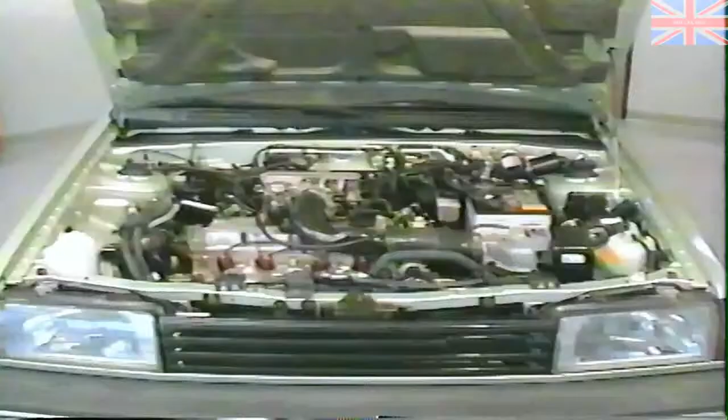Let's begin by reviewing the operation and function of the engine control system. Then we will look at the system's components and how they relate to each other and the engine control computer. The central or main controlling unit is the engine control computer. The computer takes input data from sensors that monitor various engine and environmental functions. The computer responds with signal outputs to various control devices.

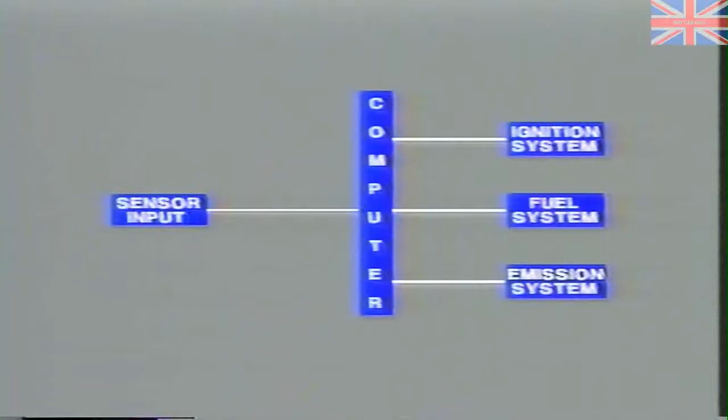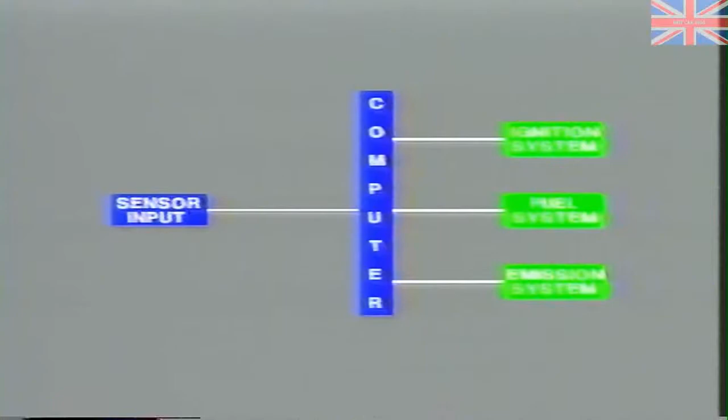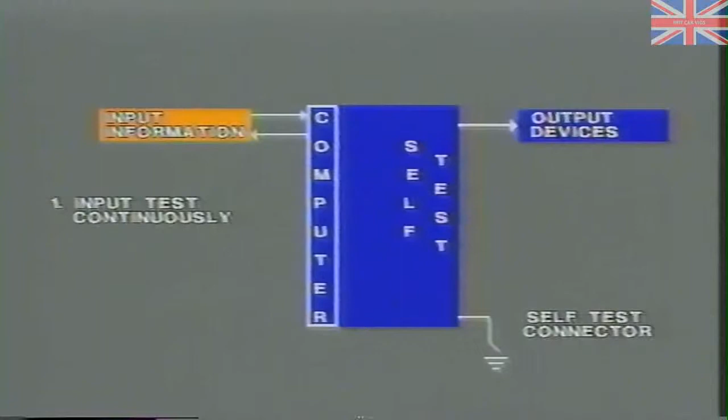The computer controls three primary areas: 1. The ignition system. 2. The fuel control system. And 3. The emission control system. The computer monitors the system input sensors and itself continuously as long as the vehicle is operating. But the computer only checks the output control devices once, during a 3-second period each time the ignition system is turned on and the self-test system is triggered.

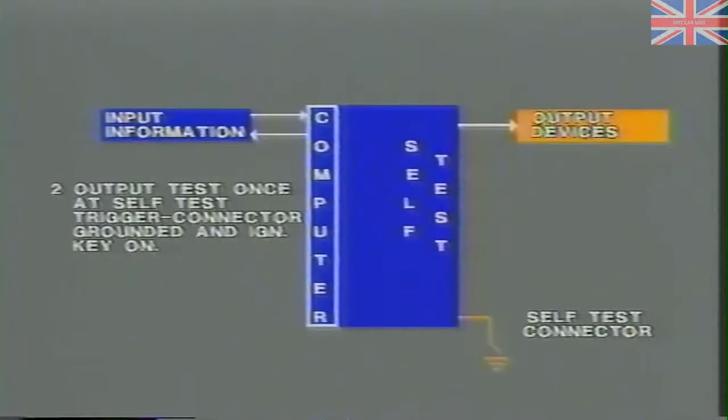This triggering is done by grounding the test connector in all vehicles. If a failure in an input sensor is detected during the self-test, the computer will substitute a pre-programmed value. Vehicle operation will automatically then be switched to a limp-in or fail-safe mode. Operations during the fail-safe mode or limp-in mode are limited in scope and drivability can be quite poor, but the vehicle will move. No substitution is performed by the computer for output devices.

The engine computer is located under the dashboard, on the transmission hump behind the console. The diagnostics display is the check engine light on 1988 and newer models. There is none on older vehicles. This light can be utilized on certain models along with the onboard diagnostic system in the central computer to display trouble codes. It can also be used to check certain switches like the clutch switch and the brake switch.

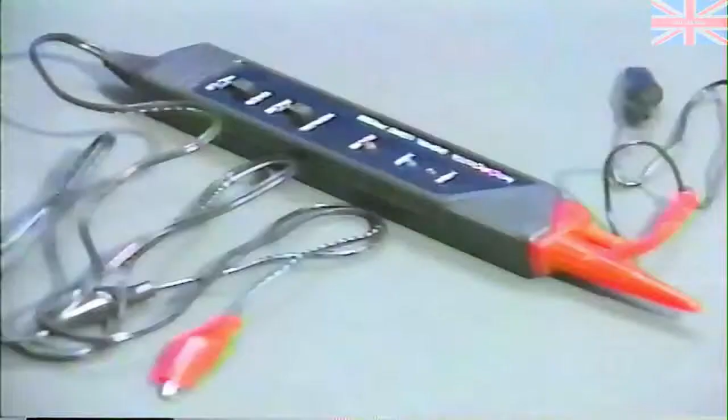In vehicles that do not use the check engine light, additional handheld test equipment like this simple logic probe must be utilized to access the codes. Logic probes can be purchased from consumer electronics stores like Radio Shack. Also, the OEM sells a test box. Let's take a closer look.

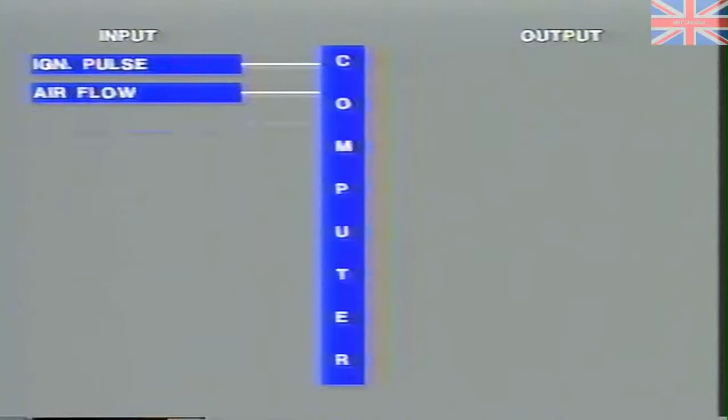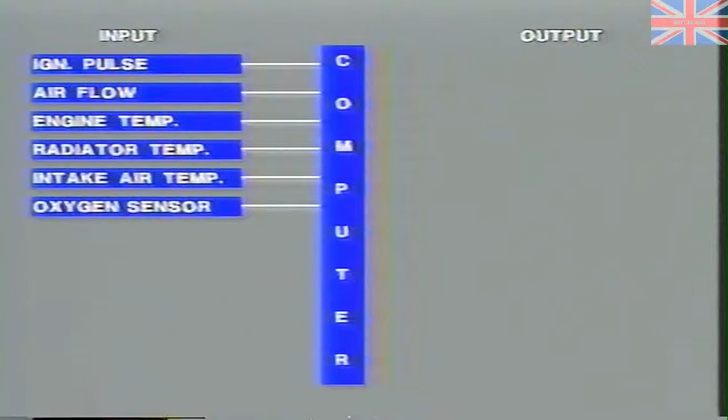The engine control computer receives sensor input readings from the ignition's distributor for RPM and crank angle, an airflow meter signal, water temperature sensor signals—one for engine temperature, one for radiator temperature—an air intake temperature sensor, the oxygen sensor, a barometric pressure sensor, throttle position sensor, a knock sensor on turbo applications, an idle position switch, an EGR position sensor, and a series of miscellaneous switches that can include air conditioning, automatic transmission, power steering, gear shift, etc.

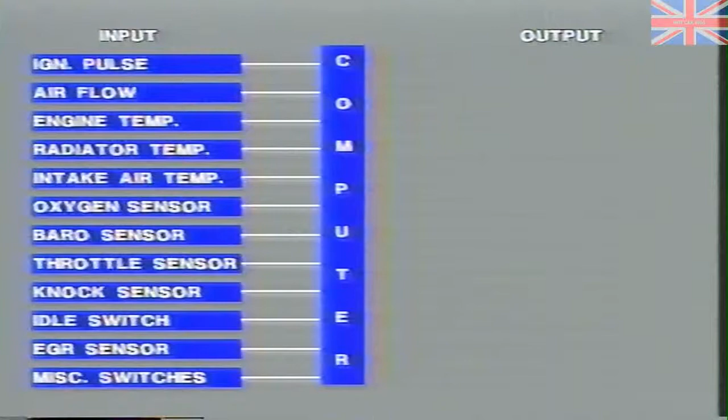The computer uses these input signals and processes them with pre-programmed information. It then responds with signal outputs to control the idle speed, control the electronic fuel injection system, exhaust gas recirculation, the evaporative emission control system, the shift indicator control system, fuel pressure control solenoid, the check engine light for self-diagnostics, and the ignition timing function.

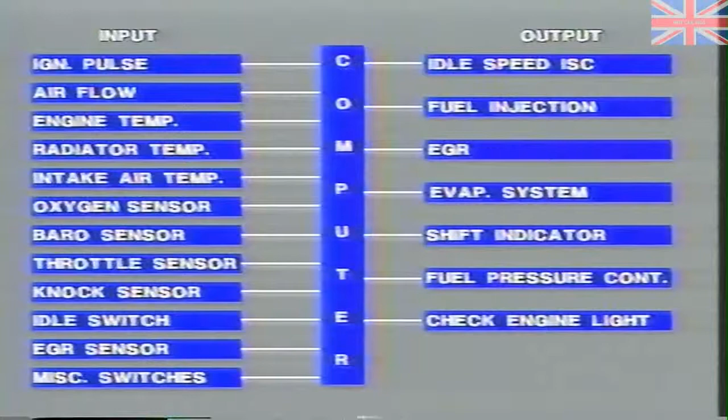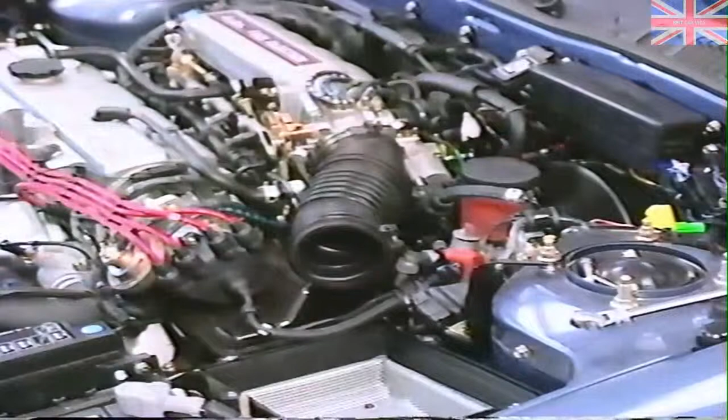A quick review of Mazda's electronic gas injection system, EGI, shows that it has an air filter assembly and ductwork, a Bosch-style vane airflow meter containing an inlet air temperature sensor, a throttle position switch mounted on the throttle body assembly, and air plenum.

The system has an electric fuel pump mounted inside the fuel tank. The pump contains a drain check valve and feeds fuel to an inline filter. The pump control switch is mounted inside the vane airflow assembly.

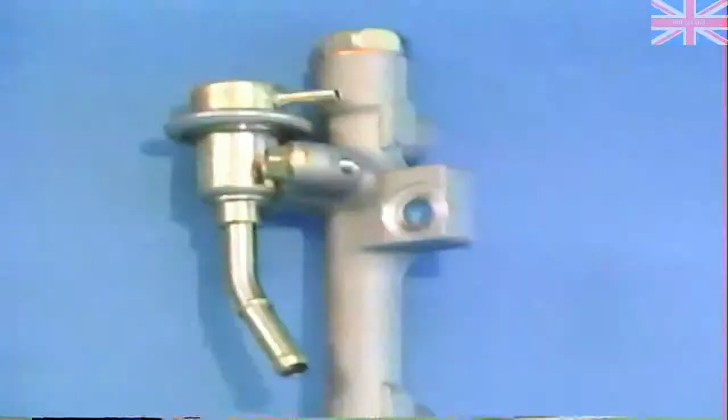Fuel flows from the filter into the fuel rail through a fuel pressure damper. Each individual injector is supplied fuel from the pressure rail. Pressure is maintained by the fuel pressure regulator mounted on the end of the fuel rail. The control pressure is a function of a spring and a vacuum signal. Excess fuel not used by the injectors flows back to the fuel tank.

Mazda does not use the cold start injector system on any of the cars with electric gas injection.

The computer's sensor inputs control the fuel injection system in two basic modes of operation. You should all be familiar with the words open loop and closed loop. In a Mazda, they don't work any differently than any other vehicle. The system operates in open loop below a certain temperature and under certain driving conditions. Closed loop operation is used to derive the most beneficial effect of the emission control system in all other modes of operation.

In open loop, the fuel injection pulse width is controlled by the computer and the computer program itself, without any input from the engine's oxygen sensor or a feedback information system.

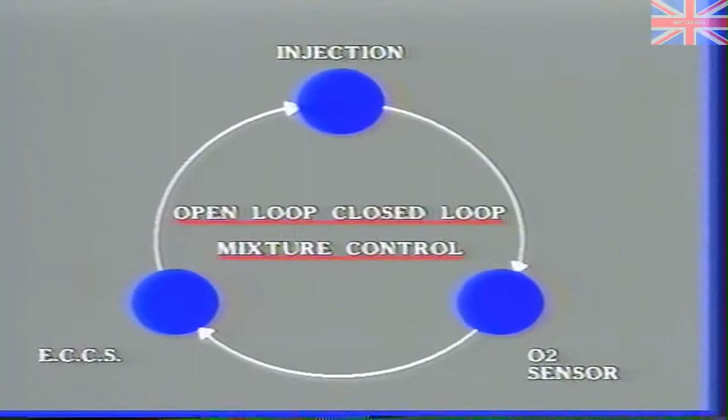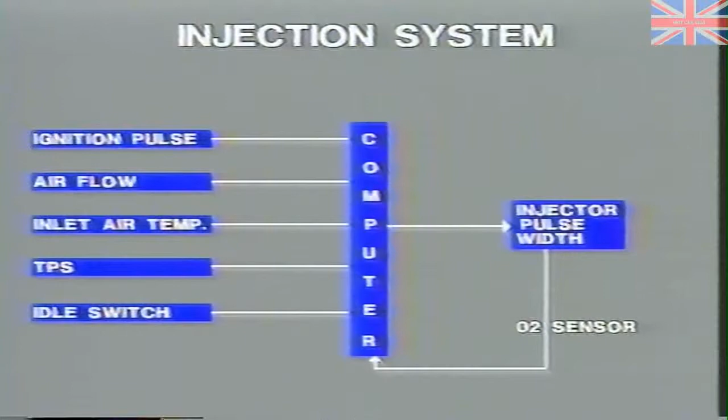In closed loop operation, the computer uses basic input signals from the engine's distributor, giving an RPM and/or cylinder position signal, the airflow meter and inlet air temperature sensor which together supply a signal on the mass of incoming air, the throttle position sensor and idle switch signaling demand on the engine, and the exhaust gas oxygen sensor signaling the outcome of the combustion process. These inputs operating together determine the fuel injector's pulse width to help minimize emission and increase drivability.

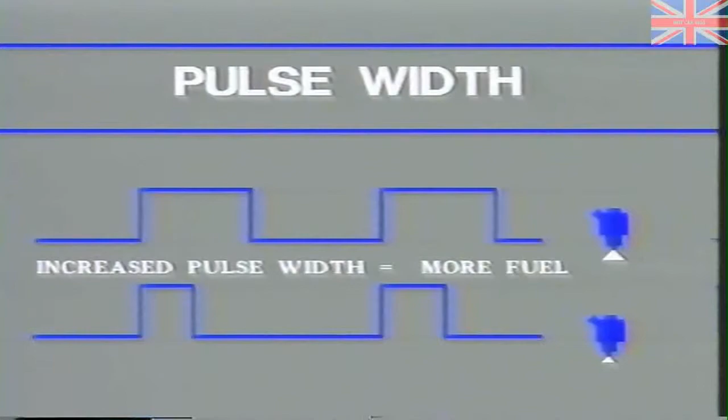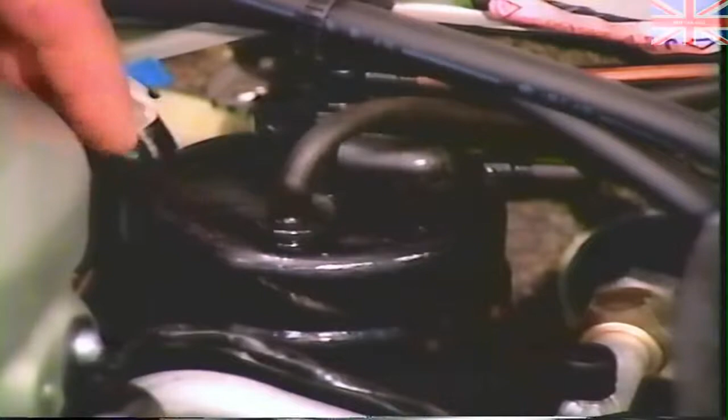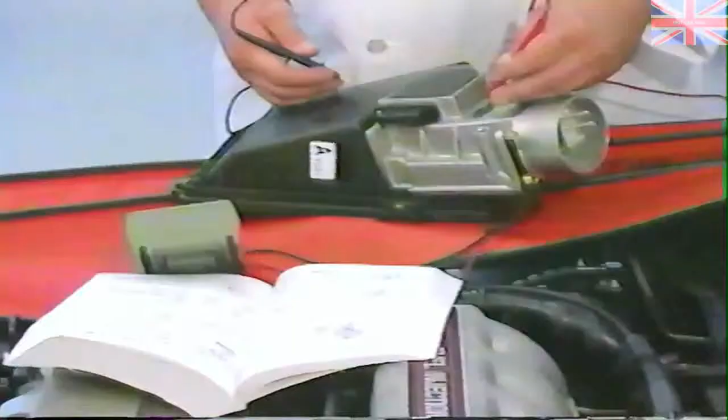The emission control system contains no surprises. A conventional evaporative system, EEC, is designed to trap fuel fumes in a charcoal canister. Two solenoid valves control canister purge, receiving their signals from the engine control computer, which uses input information from the airflow meter and water temperature sensors.

The EGR system is also fairly conventional in layout. In this MX6, or the Ford Probe, the EGR function is controlled by the computer, which uses primary input information from the throttle valve sensor, engine coolant temperature signal, radiator water temperature signal, an RPM signal from the distributor, and a transmission signal. The computer makes a decision and sends a signal to the EGR solenoid valve, which controls the vacuum available to the EGR modulator valve. The vacuum modulator assists in controlling vacuum to the EGR valve.

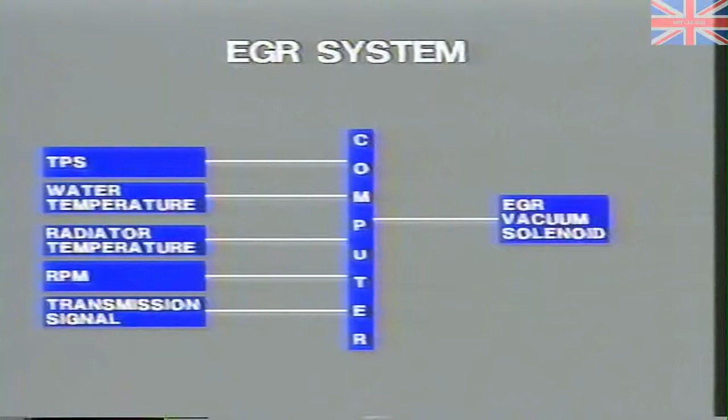Other components of the emission control system include a PCV valve system, a deceleration fuel control system, and a catalyst system. The third system, controlled by the engine computer, is the ignition system.

Depending on the engine style and the year, the timing function can be controlled either by centrifugal advance, vacuum advance, or an electronic spark advance, ESA.

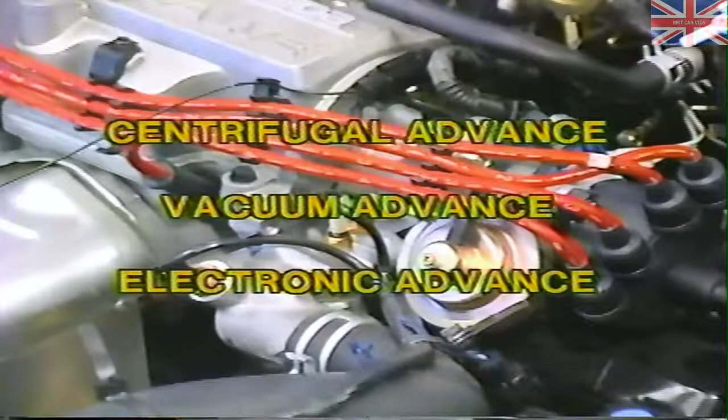Electronic spark advance is found on the 2.2-liter turbocharged engine on the MX6 and Ford Probe, also in turbo engines used on the 323. All turbo applications use a knock sensor to retard timing.

The computer controls timing by processing signals from the airflow meter, the idle switch, the clutch or neutral switch, the EGR position sensor, a knock sensor, throttle sensor, water temperature sensor and water thermo switch, an inhibitor switch, and the electronic control automatic transmission control unit.

The computer controlling signal is used by the ignition igniter assembly. The igniter assembly, or ignition module, controls the primary current flow through the ignition coil. This control of the coil's primary current flow controls the ignition spark advance.

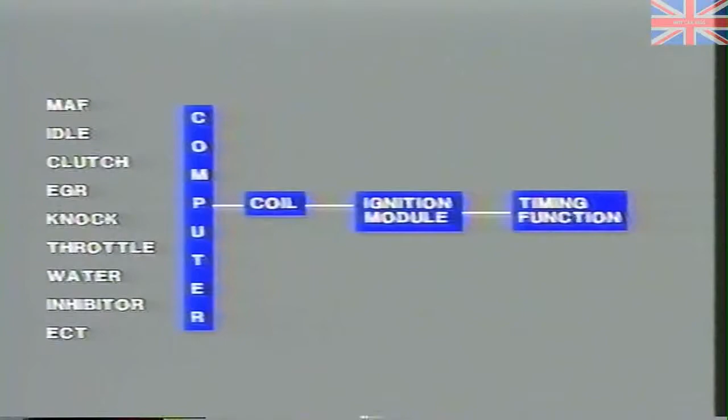Mazda also utilizes the concept of HEI, high energy ignition, on many of their ignitions. As you know, this is merely a function of the output voltage available from the ignition coil.

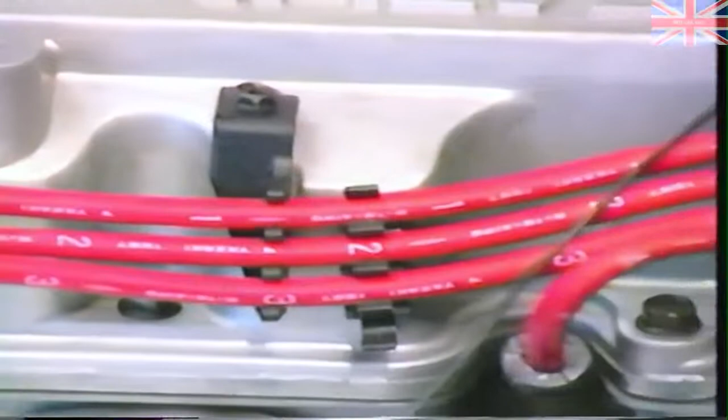A very conventional appearing secondary system is utilized for wires, cap, and rotor.

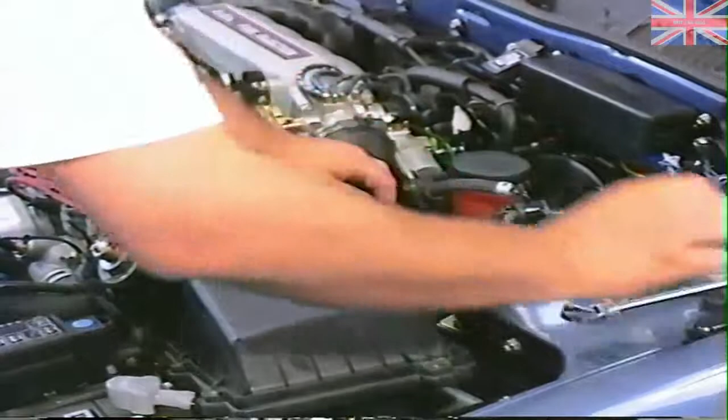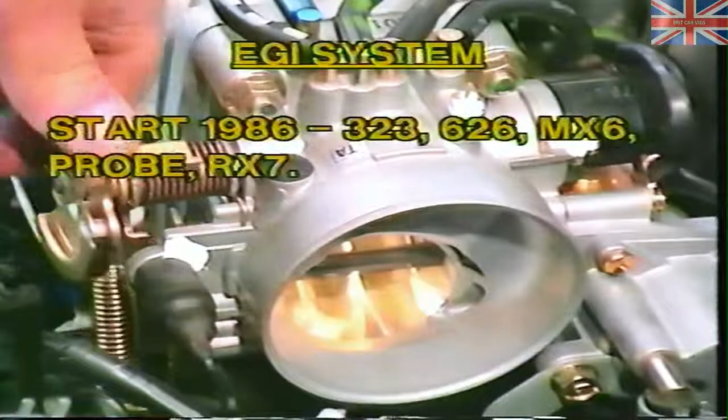The individual components utilized by Mazda throughout their electronic engine control and fuel injection system should be familiar, as they are not any different than any other brands. The electronic engine control and electronic gas injection, EGI, system has been used by Mazda since 1986 on the 323 and 626 models.

Many of the sensors utilized in the 323, MX6, 626, and Ford Probe are also utilized for the RX-7. In fact, the engine control system is similar.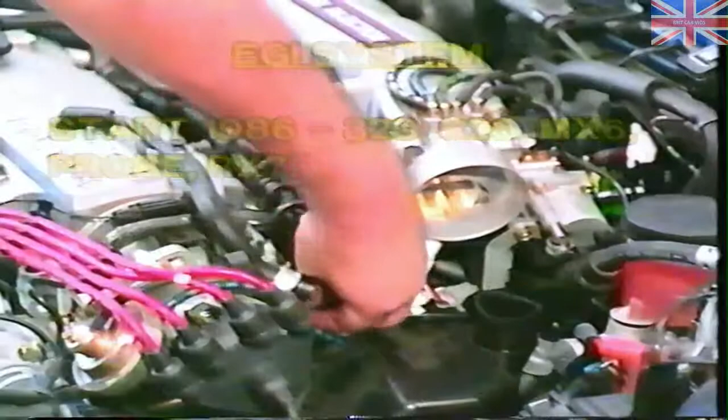We will not make any attempt to perform diagnostics or repair functions on an RX-7 during this program.

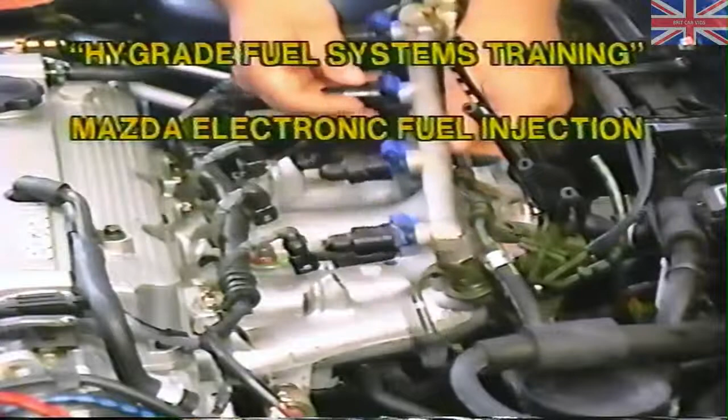Additional information on the electronic engine control system as it relates to the fuel injection system can be found by viewing the Hygrade Fuel Systems Training videotape entitled Mazda Electronic Fuel Injection.

That's it. We have covered the basic components and functions of Mazda electronic engine control systems. Now, to repair some common problems.

Hands-on experience may be the best teacher, but through the use of video, we can simulate everything except your hands actually touching the components. Ready to begin?

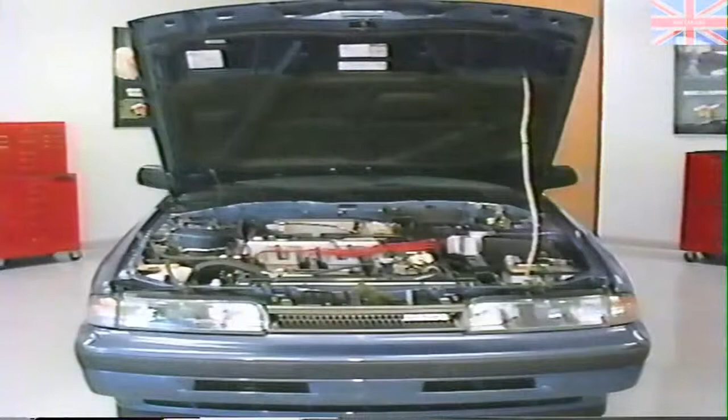This Mazda is similar to all 323 and 626 electronic engine control systems since 1986. The owner of this MX-6 has called and requested you pick up the vehicle with a wrecker.

The complaint is a no-start condition. Upon questioning the customer, you find that over the past few weeks the vehicle has been repeatedly difficult to start, but on previous occasions, after repeated attempts, the vehicle would run.

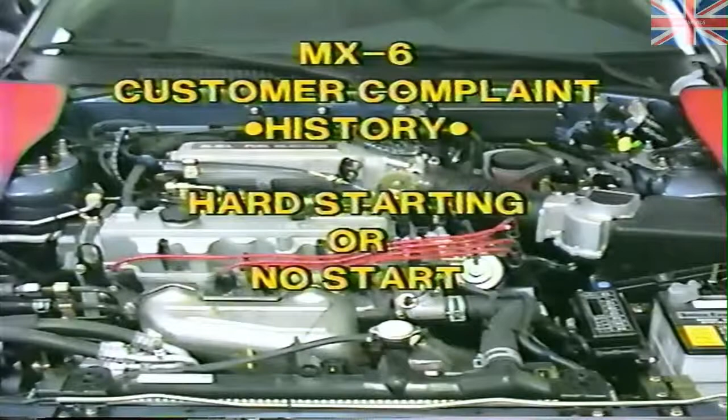With the car in the shop, what is the first step? What do we look for?

Even though you don't work on Mazdas very often, and in fact you much prefer working on domestic cars, you are willing to give it a try.

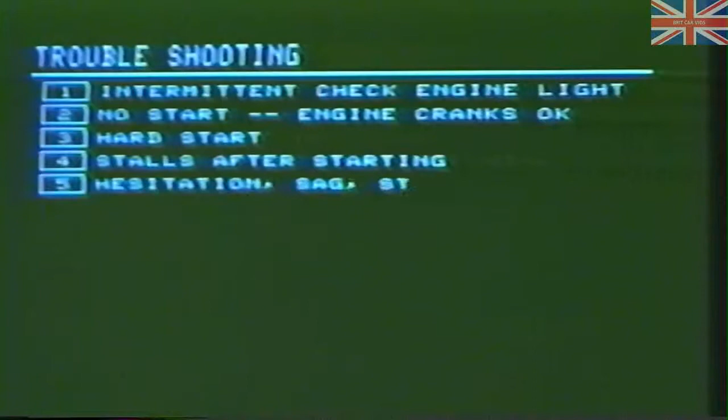As you follow along with this program, you will see that it is not any harder to repair this Mazda than a domestic car. The first thing we need to do is follow a logical approach to troubleshooting.

Ask the customer for some general information, especially about the exact year and model of the vehicle. The engine style is very important.

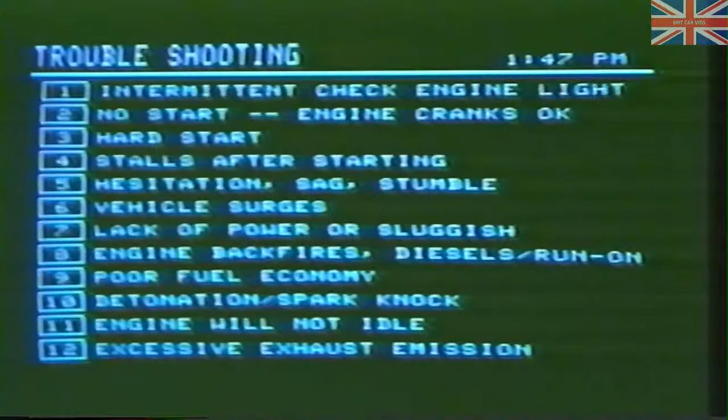Then ask the customer the questions necessary to determine exactly what the complaints are and the history on the vehicle. Remember, you cannot diagnose a problem that does not exist.

Keep in mind that the self-diagnostic system in this vehicle cannot troubleshoot everything. There are certain things that should be checked visually or with some simple test equipment, like a volt-ohm meter or a logic probe, before beginning to work on the computer itself.

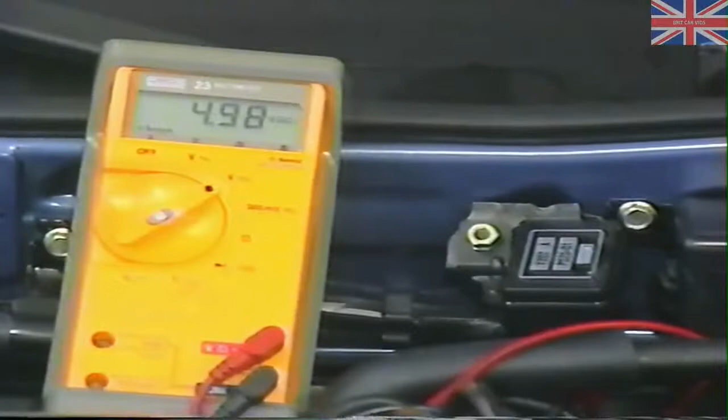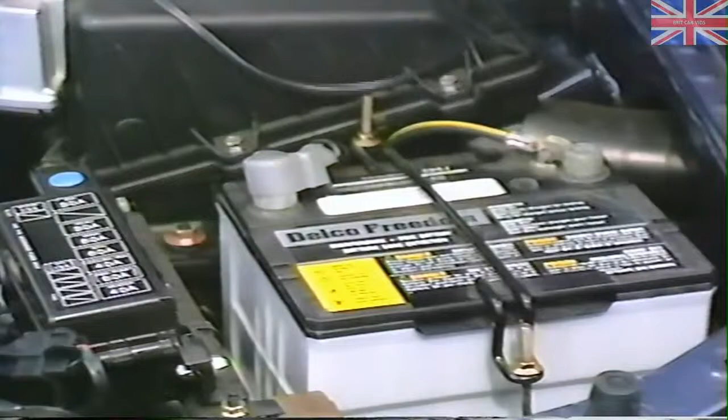Considering a no-start situation, or at least an intermittent one, we should first check the ability of the starting system to turn the engine over. Check the battery leads, the cranking system. Remember to always check the obvious.

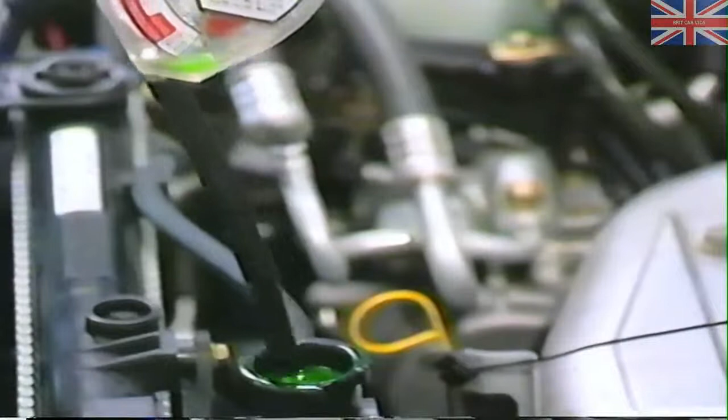Check the primary and secondary ignition systems in the normal manner. Always check the antifreeze and coolant level. Remember, the computer must have an accurate temperature sensor reading to compute the proper air-fuel mixture to run the engine.

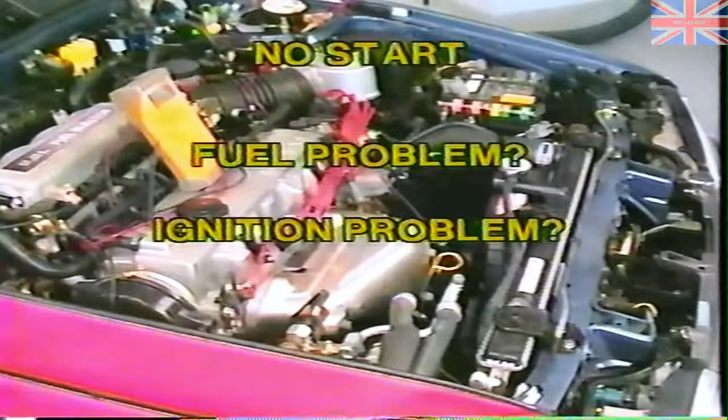A no-start situation could be fuel, and it could be ignition. Since it is obvious by turning the key that the engine turns over, the first step would be to determine whether a fuel problem exists or an ignition problem exists.

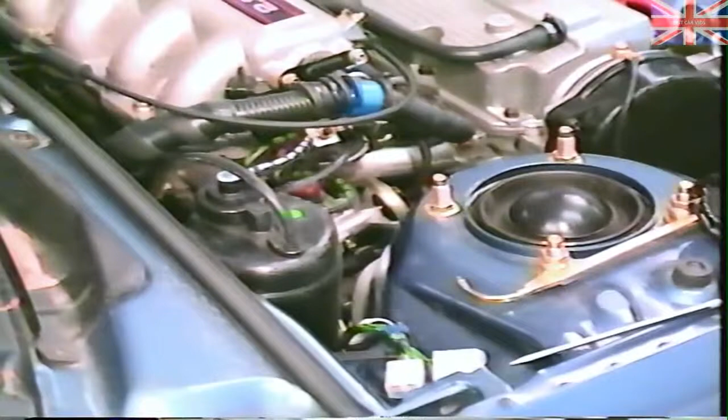Since this program is designed to deal primarily with the engine control system as it relates to ignition and emission control, we will follow the electrical-related branch of a trouble tree. Any problems related to a fuel system will not be covered here.

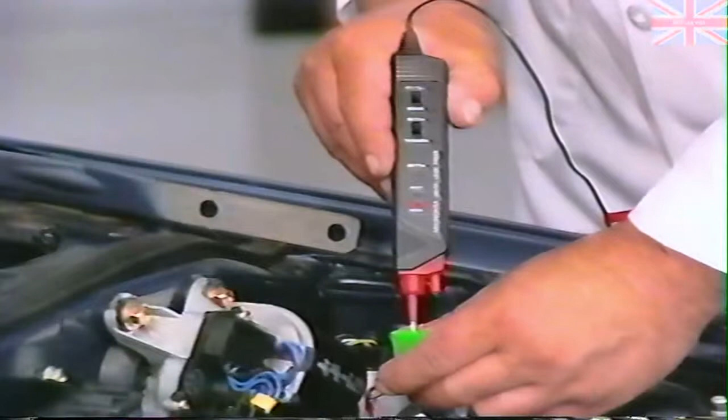The easiest method to troubleshoot this vehicle is to utilize the onboard diagnostic system first and eliminate those problems with trouble code readouts. Even though Mazda says that you should purchase or utilize their proprietary diagnostic equipment, it is a simple matter to derive trouble codes utilizing a logic probe on all models since 1986.

On 1988 and newer vehicles, it is possible to utilize the check engine light on the dashboard.

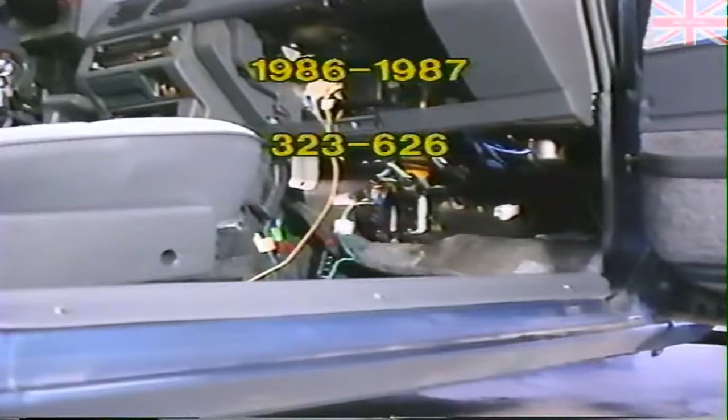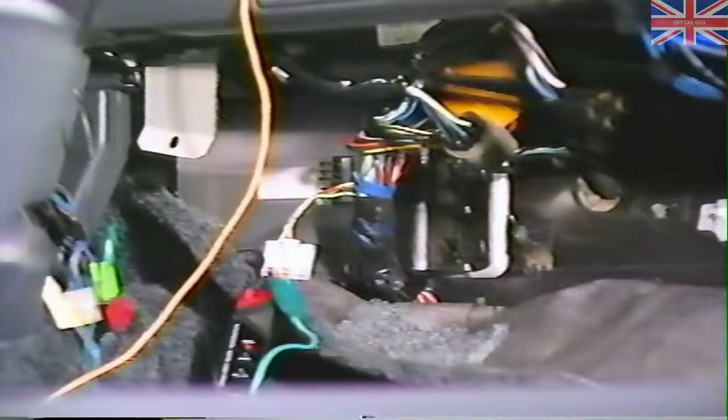On 1986 and '87 323 and 626 models, the self-test connector is found adjacent to the engine control computer on the transmission hump. After moving the carpeting out of the way, or moving the computer itself, follow the wiring harness from the computer towards the engine compartment.

Locate the 6-pin connector and the single green connector. Pull them free of the harness wires to gain access to the plugs.

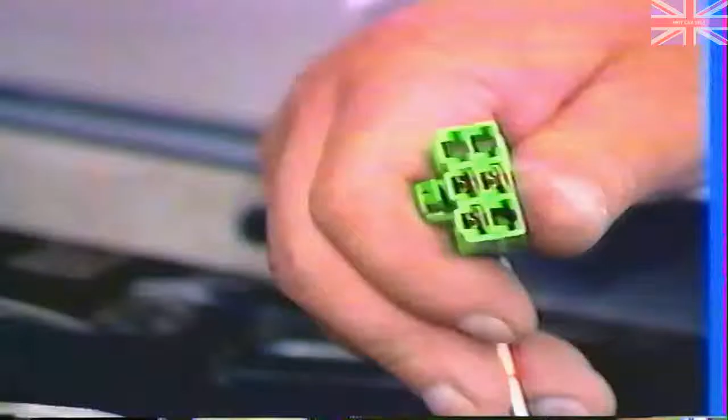If you are utilizing Mazda test equipment, simply plug the 6-pin connector into the self-diagnostics checker on the 323 and turn on the ignition switch.

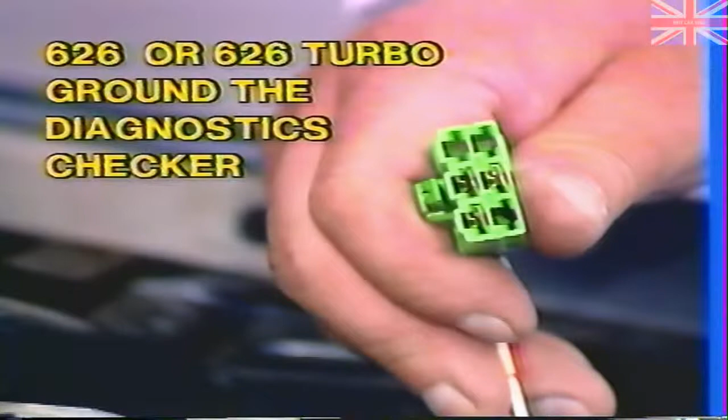If you are testing a 626 or a 626 turbo, you must also ground the Mazda diagnostics checker. Remember, the Mazda computer system only checks the output devices when the system test connector is grounded and the ignition switch is turned on. If you did not ground the test connector, only input devices will read trouble codes.

If you are working on a 1988 or newer 323, Mercury Tracer, Ford Probe, 626, or MX6, the 6-pin green plug will be found in the engine compartment near the master cylinder.

Besides the Mazda tester, you may also utilize a simple logic probe to test for codes. A logic probe is a solid-state electronics test device that will read the trouble code computer information string and also give an audio buzzer signal of the trouble code string triggered by the computer's diagnostic circuit.

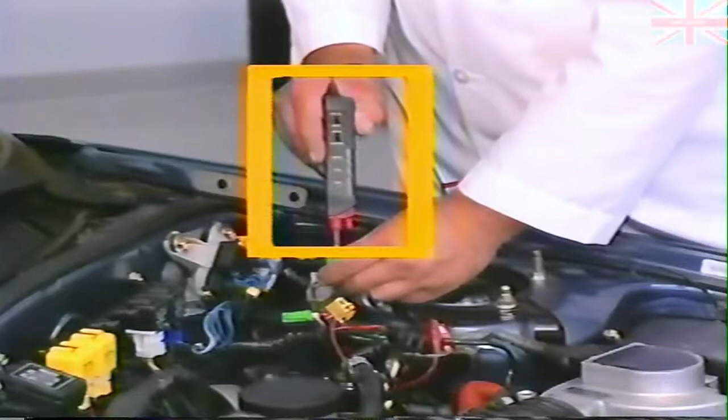First step in hooking up the probe is to connect the black and red leads of the logic probe to a power source. Next, insert the needle probe of the logic tester into the appropriate pin on the 6-pin connector. Turn on the ignition switch and read trouble codes. If you want to check output devices, ground the single lead from the harness assembly.

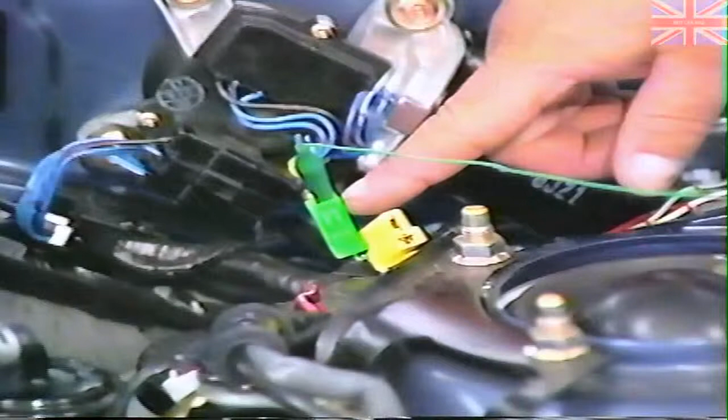If you have a 1988 or newer vehicle and will be using the dash check engine indicator, simply turn on the ignition switch and ground the single lead connector. This will trigger self-diagnostics utilizing the dashboard light. Since we are working on a 1988 MX6, which is also identical to the Ford Probe, we could utilize the dashboard indicator light, but we will also hook up the logic probe to illustrate the connection.

With the equipment hooked up and the logic probe powered, turn on the ignition switch. Note any codes for future reference. Remember, codes vary by year and model of the car. On, off, on, off. A 01. This indicates a problem with the ignition pulse or no ignition signal. That makes sense, since the vehicle will not start.

First, check the ignition coil, both primary and secondary. Specifications for the primary coil winding for a non-turbo are 1.04 to 1.27 ohms. Now, check the secondary. This looks like a simple epoxy coil, like the E-coil found on GM vehicles. On a non-turbo vehicle, we are looking for between 7,000 and 10,000 ohms.

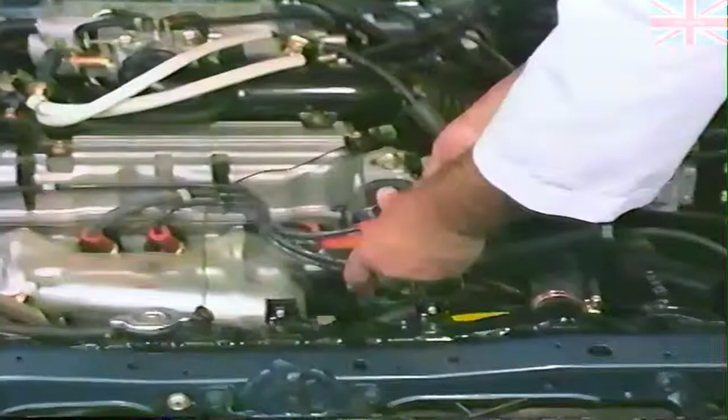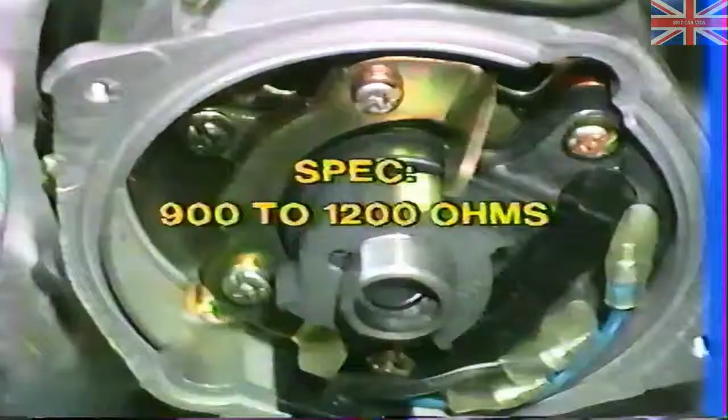Check the high tension lead for continuity. Remove the distributor cap and check the rotor and cap for carbon tracking. With these tests completed and the problem still not located, proceed with the next step. Do a resistance check on the igniter pickup coil. It should read between 900 and 1200 ohms. This is also within specification.

Next, consulting a schematic illustrates that the power feed to the ignition coil from the battery travels through the engine main relay. The relay supplies power to both the ignition coil and the injectors. The schematic illustrates that the engine control computer switches the ground side of the ignition coil to complete the primary winding's current flow in order to fire the coil. Obviously, the trigger is the igniter module input from the magnetic pickup. That has already checked OK.

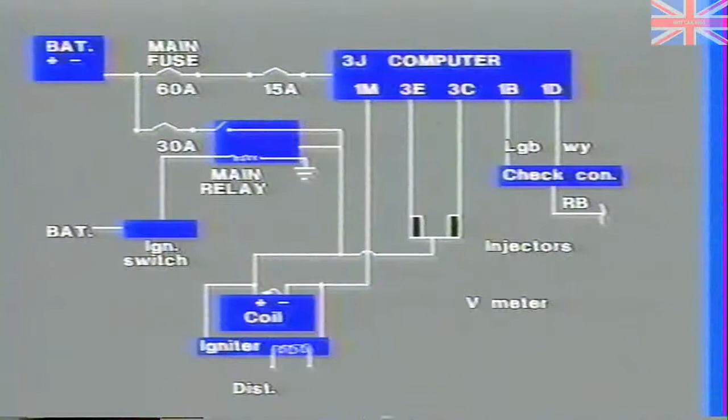Do a power check with a high-impedance digital volt-ohm meter at the negative terminal of the ignition coil. With the key on, there should be battery voltage in both crank and run position. If no power is present, check the engine main relay. Since we have power present, the next test point is at the computer itself.

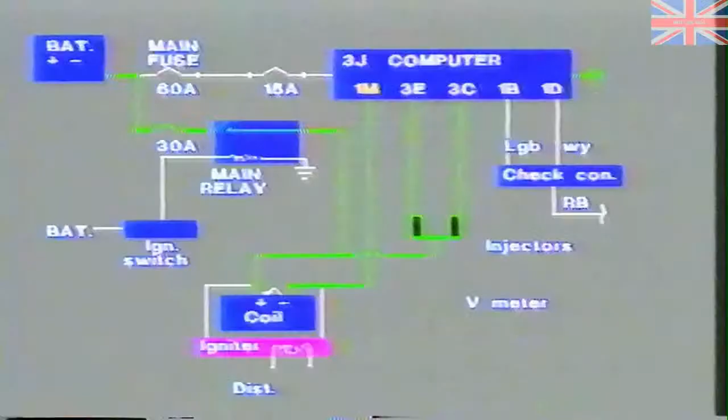Mazda does manufacture a proprietary test box not unlike a Ford breakout box, which connects between the engine computer and the harness. This breakout box will supply both current and voltage readings on each pin position. But utilizing a high-impedance digital volt-ohm meter or a logic probe, it is possible and permissible to determine if battery voltage is available on pin 1M of the engine computer.

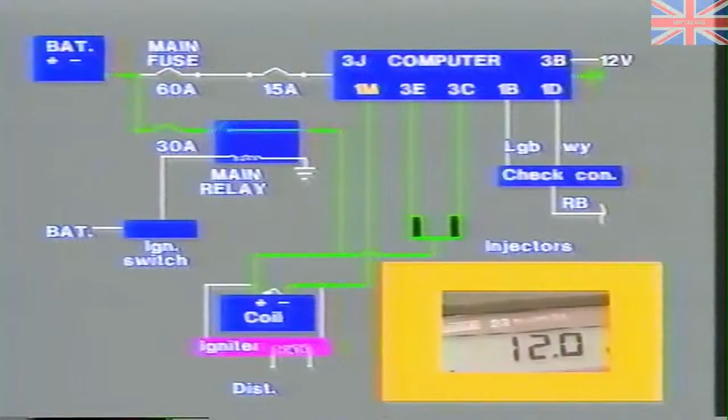With the ignition key on, battery voltage should be present on 1M. Crank the engine. It should still have battery voltage available. Since we have 12 volts at pin 1M, we are close to the problem. Check the power to the computer from the ignition switch, terminal 3B of the computer. 12 volts is available with the key on and in the start position. Based on these findings, it will be necessary to replace the engine control computer.

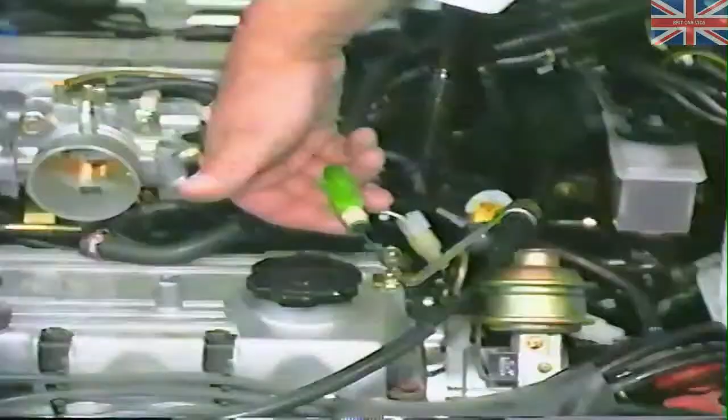With the computer replaced, start the engine and allow it to come to operating temperature. Next, make sure all the electrical loads are off, including the air conditioner. Connect the timing light and verify initial timing. Connect a jumper wire between this green test connector and ground located adjacent to the distributor. Now, recheck the idle speed. It should be approximately 750 RPM.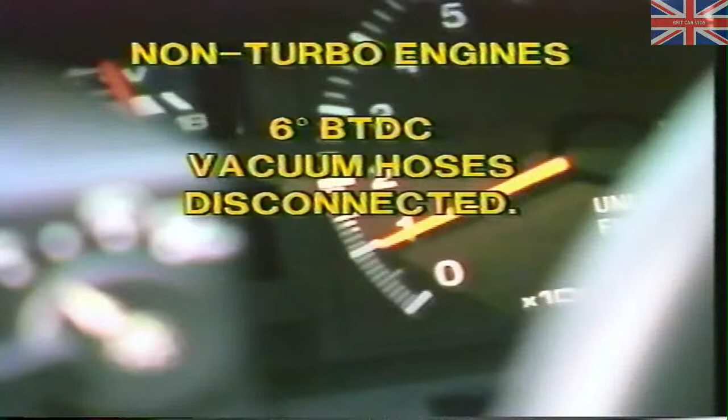Recheck the ignition timing with the test connector grounded. On this non-turbo engine, it should be approximately 6 degrees with the vacuum hoses disconnected and plugged. With the timing and idle both reset, road test the vehicle before returning it to the owner. If the complaint had been traced to a component other than the actual computer, any component where a trouble code other than 01 is displayed, it would be necessary to clear trouble codes after the vehicle has been repaired.

Mazda's procedure for clearing trouble codes states that after repairing a failure, turn off the ignition switch and disconnect the negative battery cable. Depress the brake pedal for at least 5 seconds to erase the memory of any malfunction code. Then, reconnect the negative battery cable. The number of codes varies between the 323 and the 626. 1986, 87, and 88 model vehicles have additional trouble codes added to each year. Unlike the other manufacturers, Mazda also makes it somewhat difficult to read the trouble codes.

As you can see from this illustration, a 01 is a simple on-off pulse. An 8 and a 9 are simple pulse counts of 8 or 9. A 10 is not 10 pulses, as you can see by both this diagram and the sound of a buzzer indicating a 10. 1 pulse, long pause. 1 pulse, long pause. A 12, 14, 15, and 17 are one long on pulse, followed by 2, 4, 5, or 7 short on pulses, followed by a very long pause.

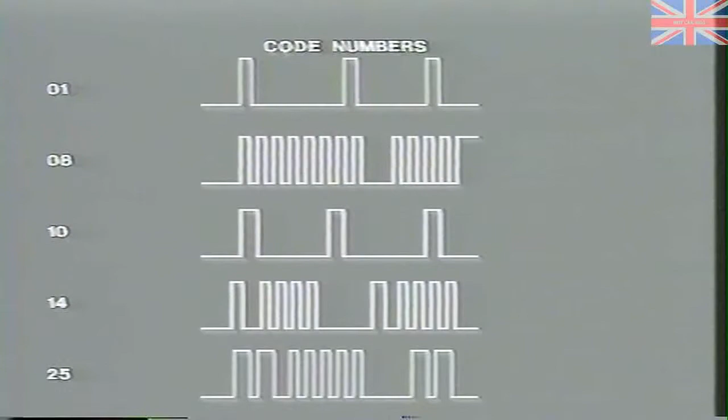Utilizing the proper service literature, common sense, and some basic knowledge of electronic engine control systems, you will find Mazdas as easy to repair as any domestic vehicle. Remember, don't turn away that Ford Probe, Mercury Tracer, or 626 the next time it comes into your shop.

This concludes working on Mazda electronic engine controls. As you have seen, they are not difficult to troubleshoot and repair utilizing onboard diagnostic systems.

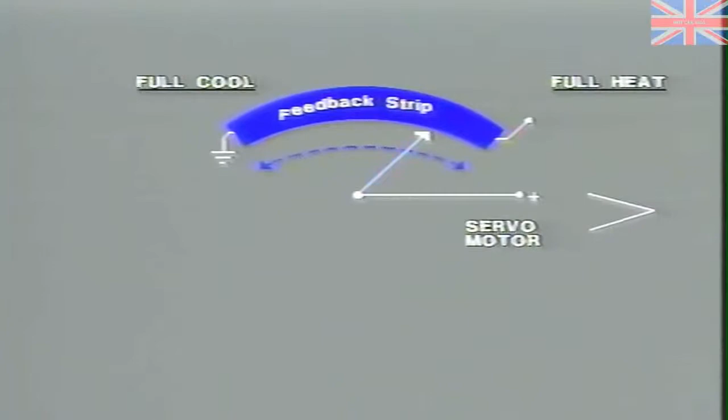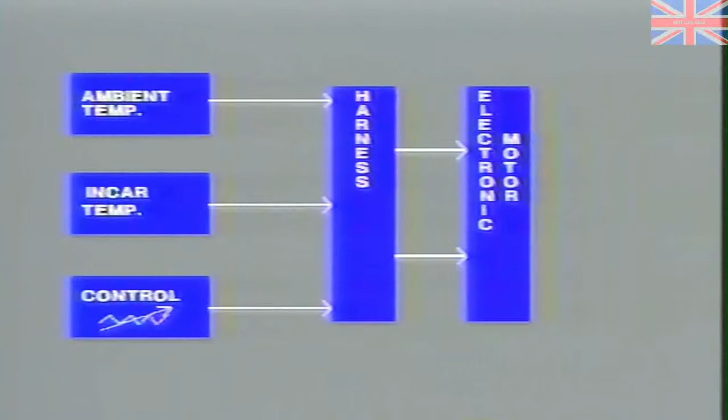Control head is connected to an electronic servo motor. The electronic servo motor uses the basic sensor input readings, the in-car sensor, the ambient sensor, the driver's control panel, and matches these resistance combinations to position the blend air door to the proper position. As the driver moves the control lever to a cooler reading, lowering the resistance at the control head, the servo motor reacts by moving the blend air door to a cooler position or lower resistance.

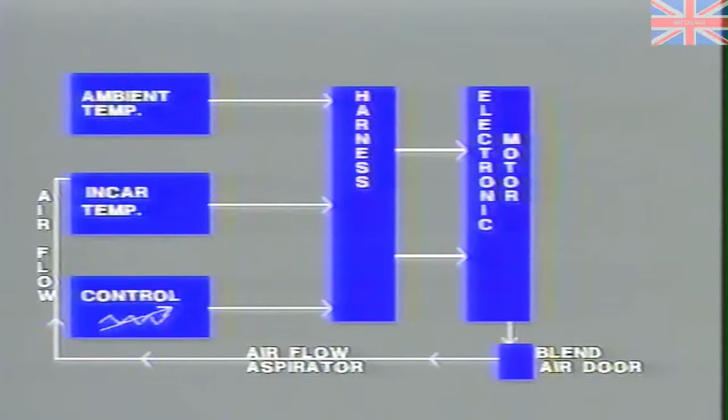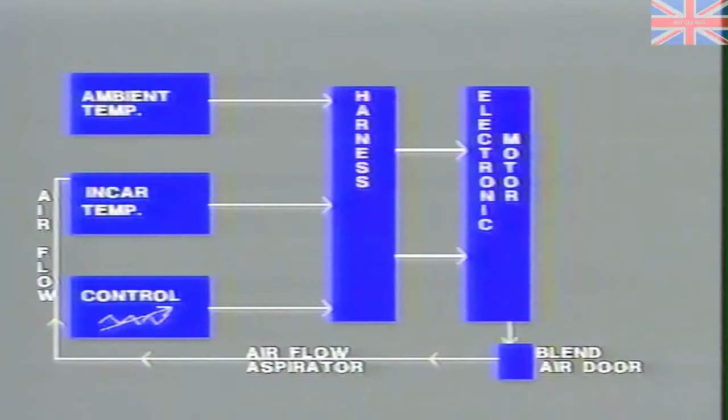The in-vehicle temperature sensor functioning with its aspirator assembly is nothing more than a thermistor that converts its temperature to an electrical resistance value. A change in this resistance affects the amount of current flow through the servo motor, altering the position of the blend air door. The ambient sensor also works as part of this network in the same manner. Remember, the operator must manually change the blower speed in this system.

Now let's take a look at Chrysler's EATC system, Electronic Automatic Temperature Control. It is found on front-wheel drive vehicles like this Chrysler New Yorker or Dodge Dynasty. In this system, a computer totally controls the blower speed, airflow, recirculate or fresh air, hot or cool to maintain the desired set temperature. The computer is an integral component of the dash control panel. This system also contains a self-test or diagnostic circuit in the computer. It will read out fault codes to help troubleshooting.

A PVM, Power Vacuum Module, is positioned on the blend air door housing. The PVM powers the compressor clutch and blower motor. It also controls vacuum to the heater water valve and certain vacuum motors. The blend air door is controlled by a DC motor wired into a feedback circuit. As the door is moved, it sends a feedback signal to the computer, telling the memory circuit where it is, for example, 15 degrees or 20 degrees, etc.

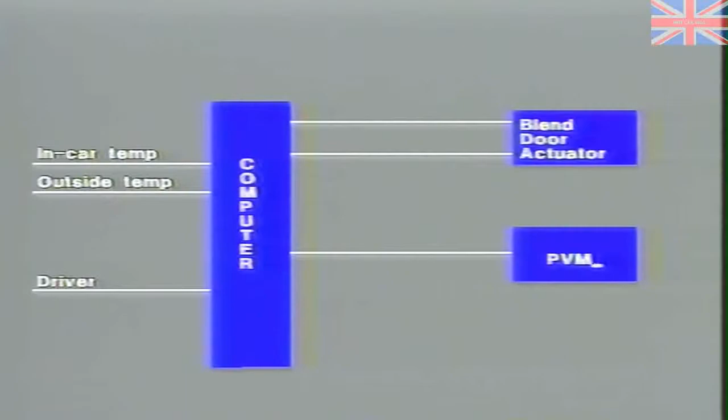Let's test this Chrysler New Yorker EATC system and repair any problems found. First, conduct a performance check. Start the engine and let it reach operating temperature. Press the panel button on the AC control. Make sure the display lights. With the display lighted, press the defrost, floor, and bi-level buttons at the same time to enter self-diagnostics mode. Note, as of 1988, this button is labeled Auto.

You should see all the elements on the display at this time. This is your clue that you have entered the self-diagnostics mode and the system testing is in progress. The whole test will take about 90 seconds. With a notepad in hand, let's watch for trouble codes. A code 14. No other codes are indicated. Before any repair work is started, press Off. If the system were tested and it found no fault codes, a 75 would read on the control panel.

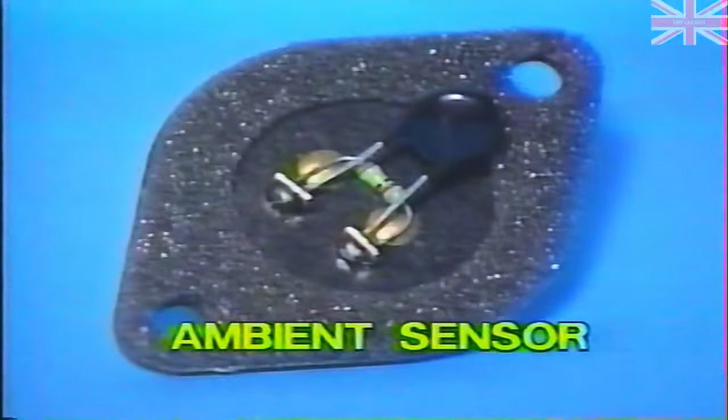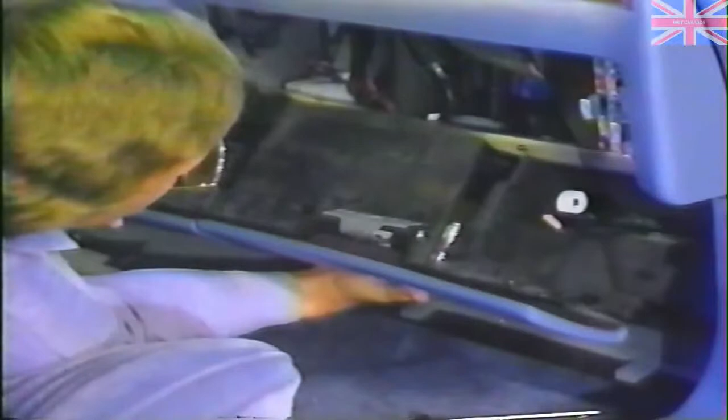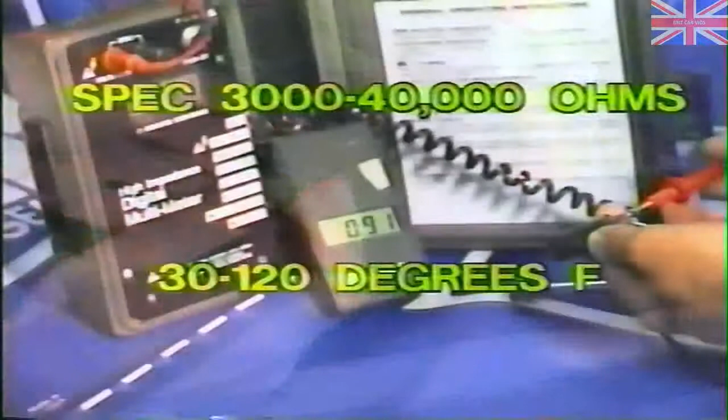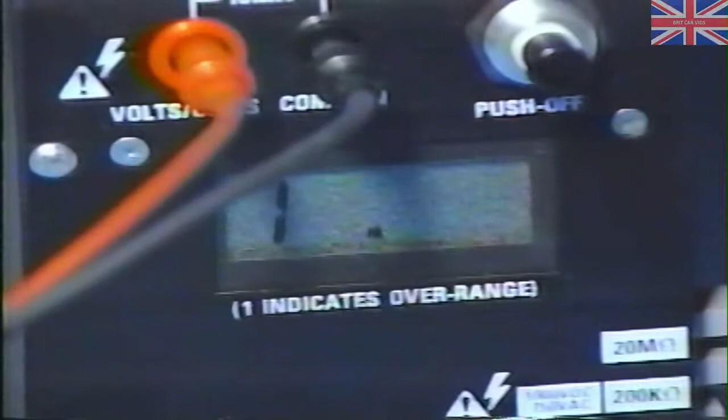The trouble code 14 indicates a problem with the ambient temperature sensor. So let's continue and remove the sensor and check the component. With the glove box panel removed from the dash panel, it is not a difficult task to unscrew and remove the ambient sensor from the air plenum. With the unit unplugged, measure the resistance of the sensor. It should be 3,000 to 40,000 ohms at between 30 degrees and 120 degrees Fahrenheit. This is a very wide range, but normally the component will open circuit when it malfunctions. We have an open circuit, identifying a failed component.

With the component replaced, again, do a performance check of the ATC system. Then recheck the self-diagnostic system and look for fault codes. Note that testing and repair of the in-car sensor is done in a similar manner. You can see that most problems can be corrected with the use of a simple volt-ohm meter and service literature and the self-diagnostics procedures outlined.

This concludes working on automatic temperature controls. As you have seen, they are not difficult to troubleshoot and repair utilizing onboard diagnostics.